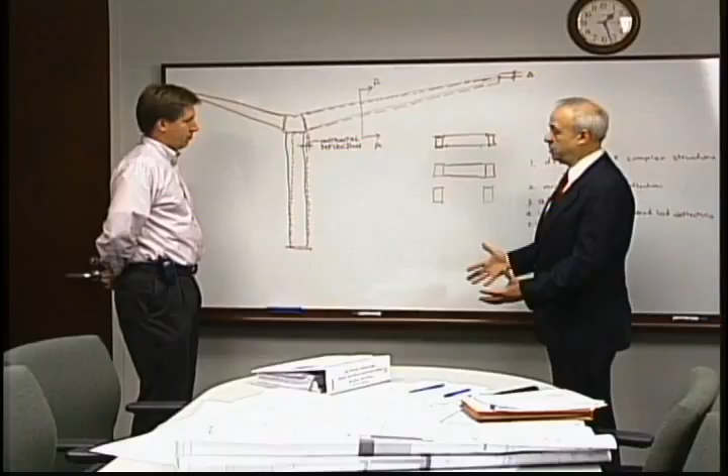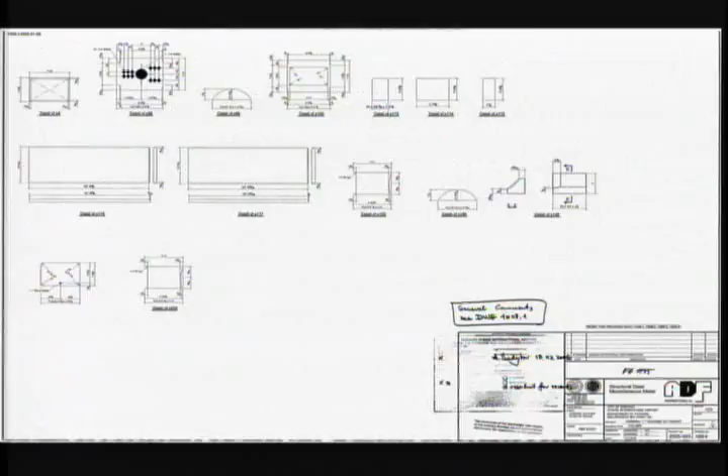Main consultant. The canopy drawings did not have any reference to the special tolerances or adjustable connections that really were necessary to build these structures. They had reference only to the standard tolerances that are in the American Institute of Steel Construction Code of Practice. There was no reference to architecturally exposed steel structures, nor was there any other special tolerance or adjustable connection specified.

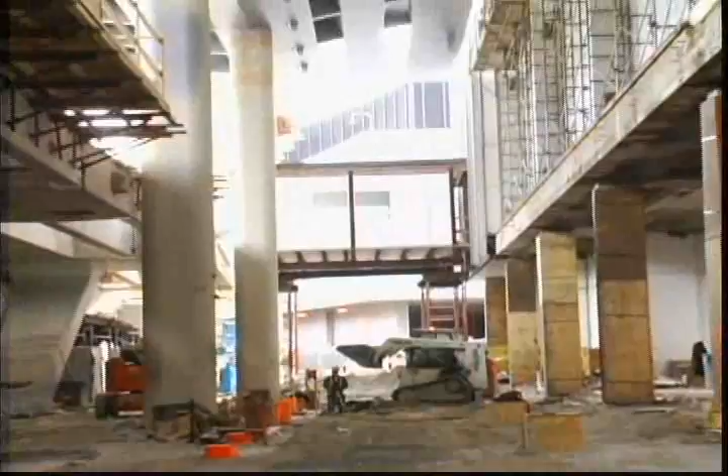In the original engineering plans, specifications for the canopy steel refer to the canopy as a special structure. There is no significance in calling a structure special because such a term is not recognized in the industry as it relates to the codes and classifications of steel structures.

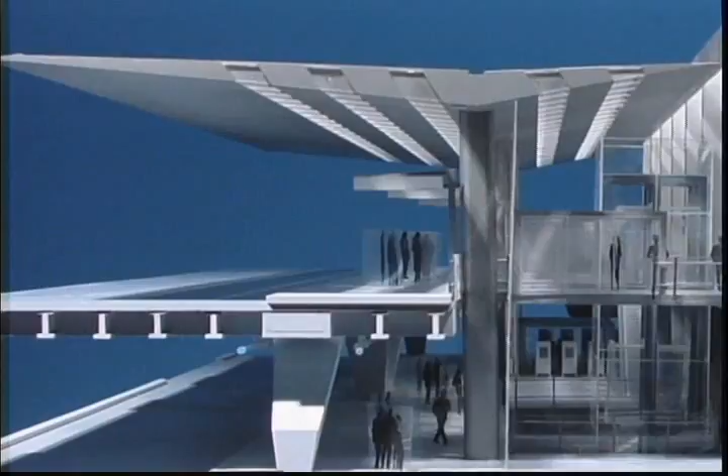However, there is a term called complex structures that is recognized in the industry that may require certain pre-qualifications as well as special care to be taken both in fabrication and erection of that structure. However, unfortunately, there was no reference made to it in this specification. Walsh contends that if the structure was classified as a complex structure, their approach and bid would have been considerably different.

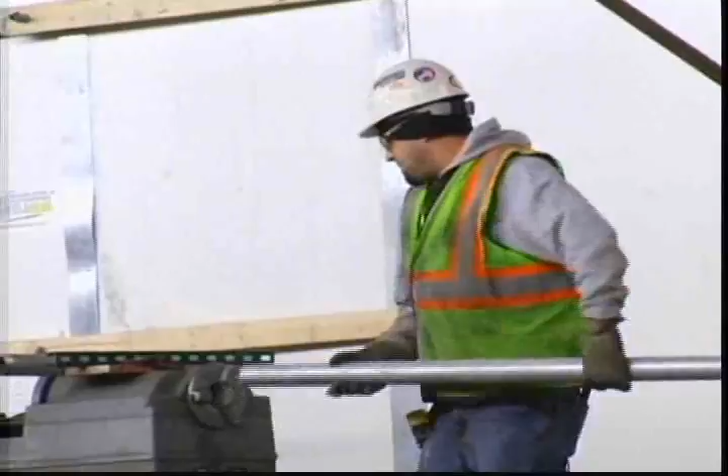It reached the point in the summer of 2003 that there were daily conference calls held between the fabricator, the fabricator's engineer, Carlo Steel, Walsh Construction, TOK, that's the DOA's construction manager, Murphy/Jahn, the architect, and WSI, the engineer of record. Daily conference calls to resolve issues that were not clearly shown on the construction drawings. For Walsh Construction and their subcontractors, this additional work added extra engineering design time and delays.

The absence of column deflection analysis and design delayed canopy construction further. Column deflections are not shown on the design drawings. The fabricator's engineer, in building his model and loading the model, noticed that the columns deflect, which led to questions to the engineer of record. Did this matter?

Engineer of record had shown on the drawings expected deflection of the canopy under its own weight. And that's a very significant number that needs to be used by the contractor in order to compensate for it when he is building the final canopy structure. However, our analysis shows that they used a wrong model. They forgot to include, or maybe they did not want to include because of complexity of the analysis, the composite section that includes the top plates.

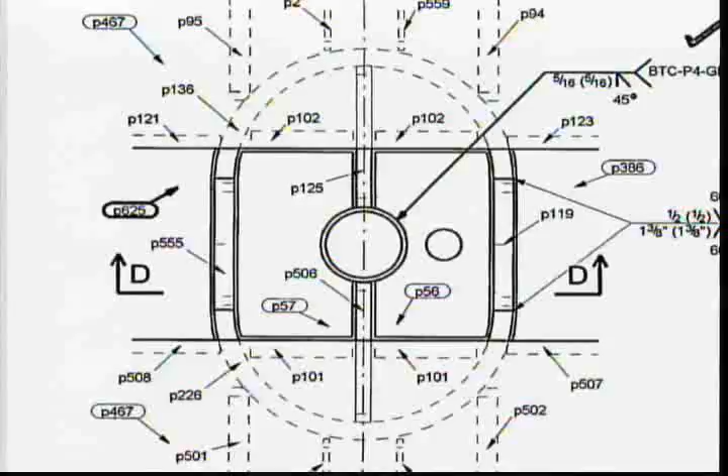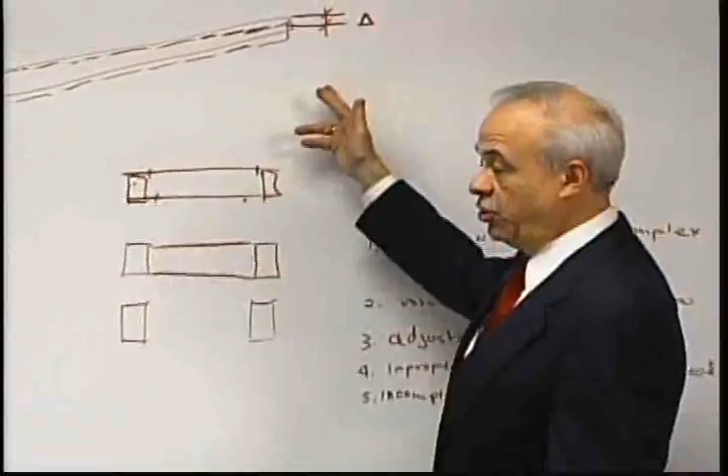The default specifications in the original engineering drawings proved to be inadequate for the canopy design. I believe many of the requests for information we sent in at the beginning of the project were simply not answered, not due to ignorance, not on purpose, but TOK simply didn't have the technical ability to handle this problem. These miscalculated deflection variations on the original engineering plans could have resulted in a significant error of several inches when the canopy was completed.

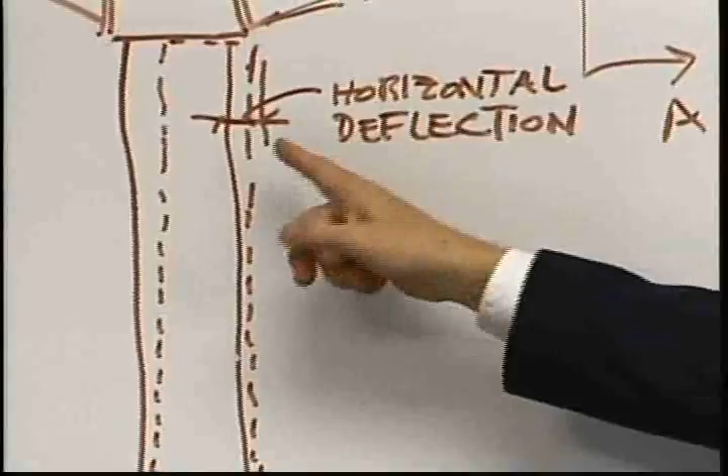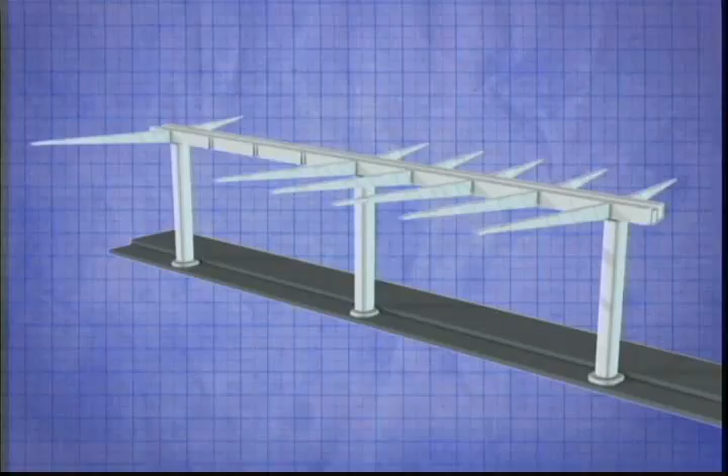By not specifying expected horizontal deflection, nor having a special adjustable connection between different elements of this structure, then miscalculating the vertical deflections by the engineer, the tip elevation and location could be off 6 to 8 inches in any direction. A 6 to 8 inch discrepancy in the cantilever tips could have resulted in buckling and distortion of the entire top plate of the canopy.

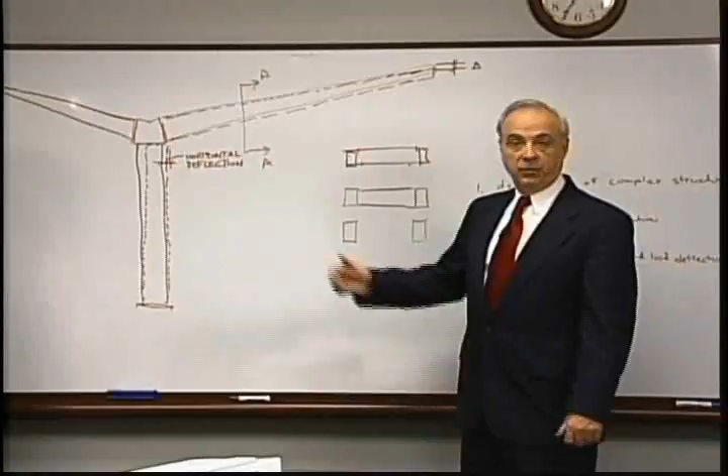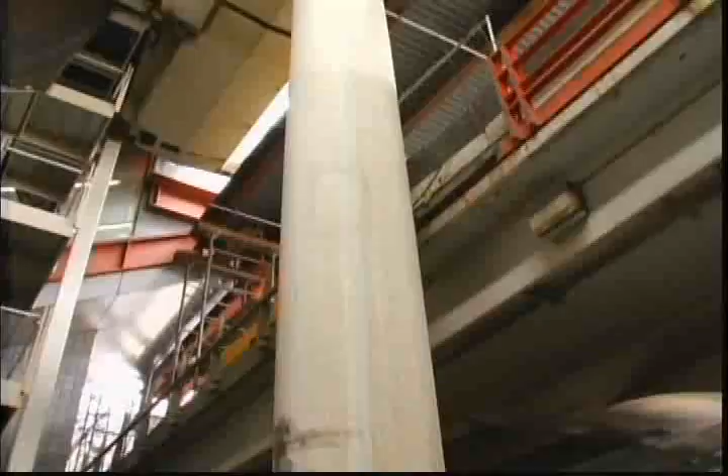The same issue would have occurred with the curtain wall had Walsh not implemented an adjustable connection for the cables. There was a need for tighter tolerances or adjustable connections between some of the structural elements in order to build the canopy with the geometry that was intended by the engineer. To compensate for the incomplete and inaccurate engineering drawings and complete the canopy correctly, Walsh was forced to spend considerable extra time, manpower, and expense erecting the canopy.

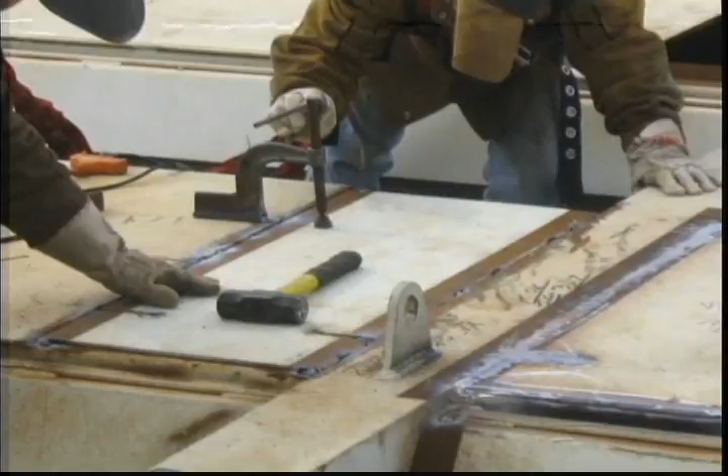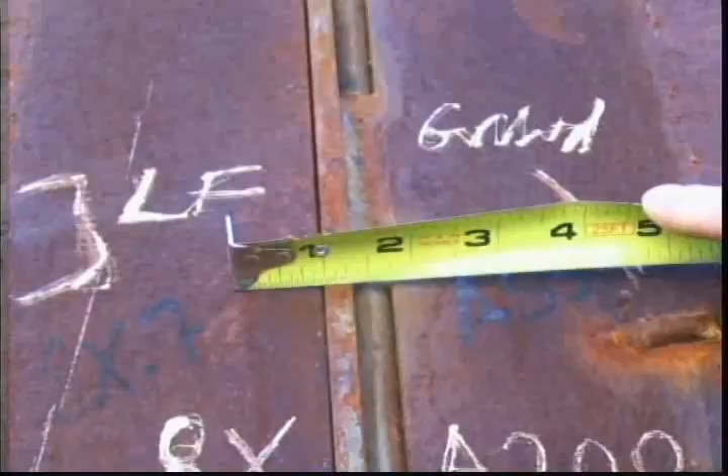The deflections that were listed on the drawings were misleading, and they made the contractor spend all kinds of time and money trying to meet those deflections. Deflection discrepancies on the engineering plans forced Walsh to erect the columns out of plumb and, in order to ensure that the cantilever tips would align properly, had to continually field measure and adjust the canopies at a number of different points.

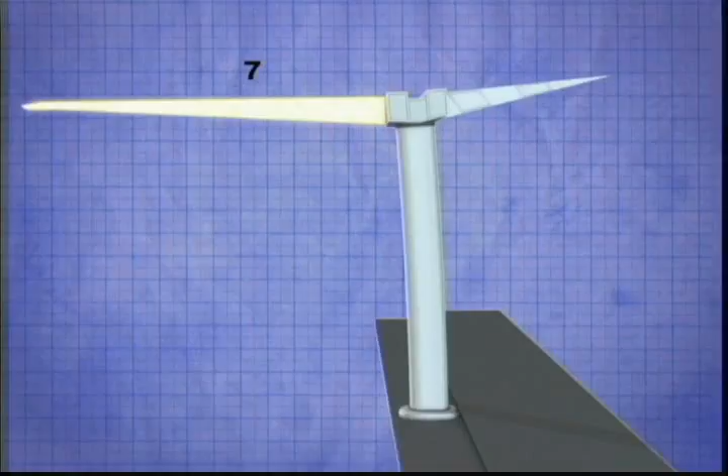The fabricator had to custom fabricate each infill piece for the openings to assure the canopy would be straight and aligned. This had to be done for all 420 wing sections. There are hundreds of feet of weld not shown on the design drawings that each required 20 to 30 passes. This is 1.25 to 1.5 inch thick material.

The City of Chicago hired an independent engineering firm, the Thornton Tomasetti Group, to evaluate the canopy structural steel issues. The Thornton Tomasetti Group concluded the public bidding process did not allow for proposing alternatives to simplify fabrication prior to bid award, and because tighter tolerances and extensive post-fabrication work on members have cost and time implications, they should have been shown in the contract documents before the contract price was fixed.

The bid documents missed 5 major points of design that severely impacted the canopy work at O'Hare. They omitted deflection information. They didn't show that the columns deflect under dead load. The deflection information that they showed for the canopy wings, the vertical deflection, was incorrect. They didn't provide a median temperature for the fabrication and the erection of the structure. They didn't show any connection details. And they didn't consider issues that affect the constructability of the welded structure.

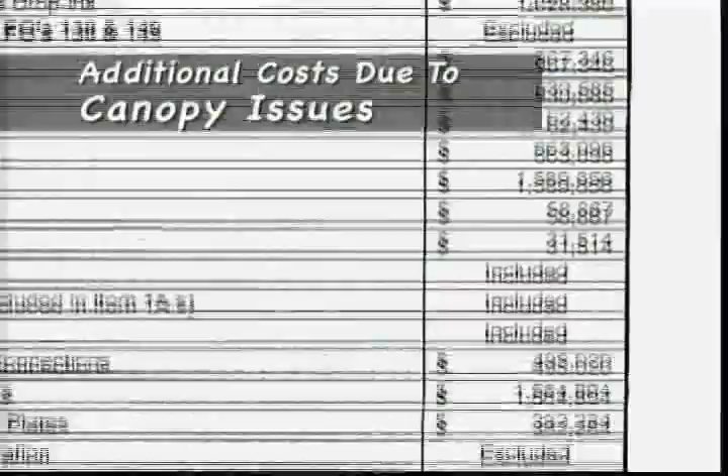The independent analysis provided by Thornton Tomasetti clearly supports Walsh Construction's claims, and had Walsh Construction been provided with accurate and clear drawings, they certainly would have bid the job differently to account for all of the additional labor and material. The cost to Walsh and its subcontractors totals $24.9 million.

The structural steel design for the canopy on this project was not a full and complete design. There is no simpler way to say it. It was not full and complete. There was missing weld information. There was missing weld location information. That design not being complete is something that a designer should not be allowed to get away with. Owners pay designers a lot of money, and they pay them a lot of money to do things properly. This design was not done properly.